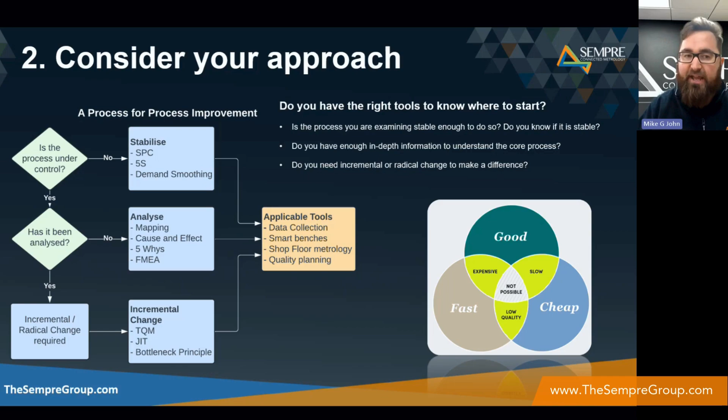So all of these need to generally be understood in terms of how does that affect it, because if it's cheap and it's good, you need as much of the analysis every time. If it's good and fast or whatever it might be, do you actually want to renege on the quality aspects here? And what you really want to be doing throughout all of this is taking all these in together. So this aspect here, in terms of considering your approach, often is the most time consuming, because you're usually finding a different technology, you're looking for solutions which can help you gather your data, etc.

Once you've got through that aspect of understanding what approach you need, understanding that we need data here, we need to analyze this and everything else, then you're going to start to look for solutions. You're going to say, right, okay, how can we stabilize our process? How can we analyze our process? What tools do we need in order to do that? And how does it fit within that aspect of, do we want it to be really cost effective? Do we want it to be absolutely robust? Do we want it to be fully automated and future proof? Those aspects really.

A lot of the time, that's where we find a lot of our customers come to us. They've gone through this journey or a journey, and they're looking for the solution. But we do often see that steps 1 and 2 haven't necessarily been thought about. So they're coming in from we can't measure this feature, this part, and we need to measure it. It's more of we have a problem to solve, rather than we're seeking the outcome, which might be, instead of we need to measure this part, it's our customers or our clients have expectations or standards that we currently can't meet. It's a slight paradigm change, subtle, maybe too subtle in many ways, but important, as we see.

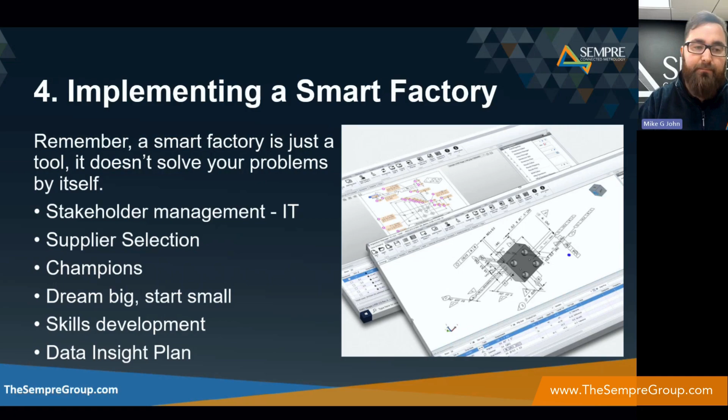And then finally, really, this is the crux of a smart factory: the informed decision making and then refocus. The step here I've got is shamelessly stolen from a sci-fi book that I very much enjoy, which is that if you have data, you can get insight. If you get insight, you can get control. And if you have control, you have power.

And that really is what we're talking about here: through the acquisition of the correct data, you can have the power to make the decisions, knowing that it's going to make a difference. And that is really the end goal of this entire smart factory. We've got everything involved. It's nice and shiny. Everything's blinking red and green lights. But that's not it. You then have the data. Now the problem is, how do you go about talking about it?

I'll harken back to a customer that we had a couple of years ago who did just this, and they had an idea of exactly what they wanted to do. This is the same customer with the grinding machines for an aerospace application. They replaced their old machines with brand new ones. They replaced all of their gauges with automated metrology systems and fixtures, and the data was all being collected and analyzed. This is an aerospace application where 100% inspection is often key, but it also allowed them to understand when the redressing of the grinding wheels needed to occur.

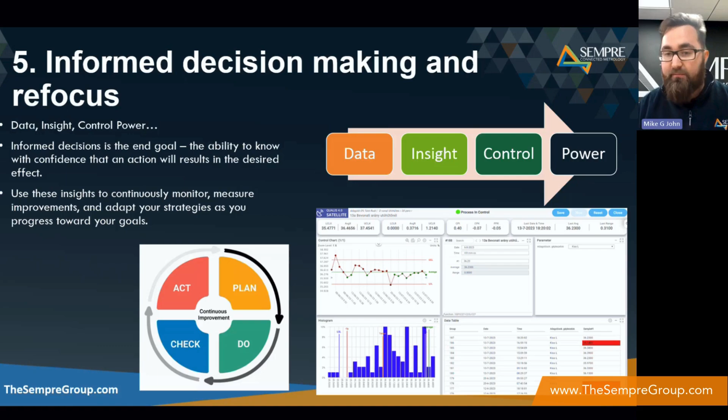It was the attitude, the implementation, and the accepted fact that the plan, do, check, act, continuous improvement type philosophy is going to be brought in throughout the next 12 years or whatever it might be.

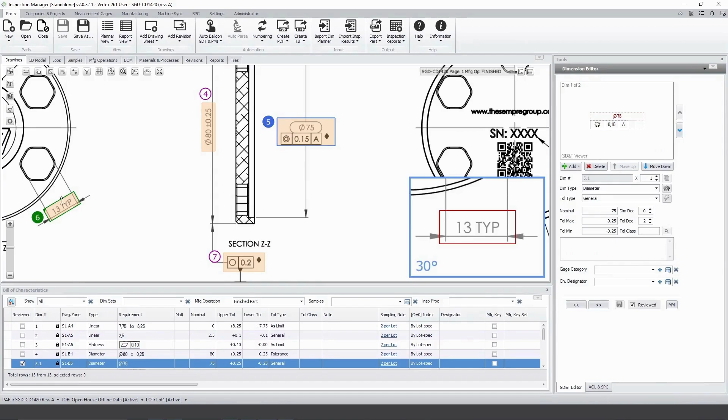And so with that, I just wanted to give a quick demonstration of what we mean by this in terms of what you can see if you came to Sempre, which is a smart manufacturing demo. This is something you will see internally at Sempre. We have something called High QA, which is software that allows us to automatically balloon and create inspection plans for our components. This component is one that we've designed and made ourselves.

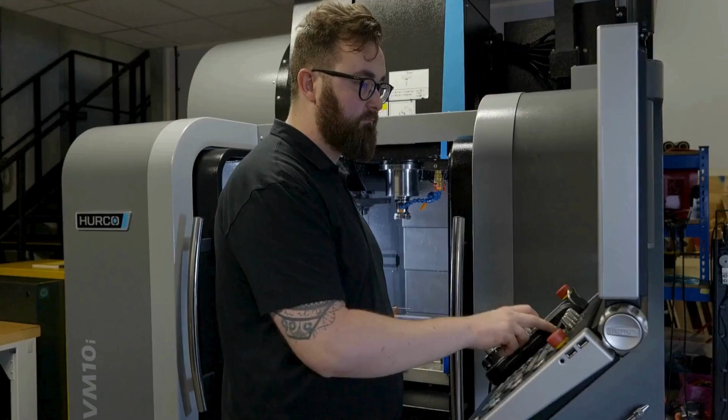And it allows you to, as I said, automatically balloon your drawings. It will produce an inspection plan, and then you can go and manufacture it. And this chap here is currently manufacturing some stuff on our machine tools that we have here at Sempre. And so we're going to manufacture it.

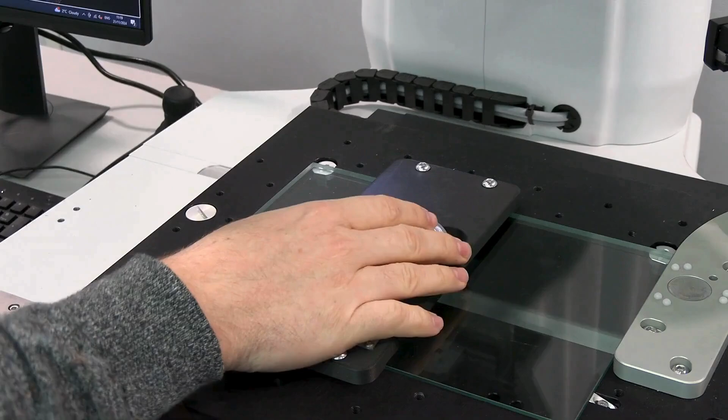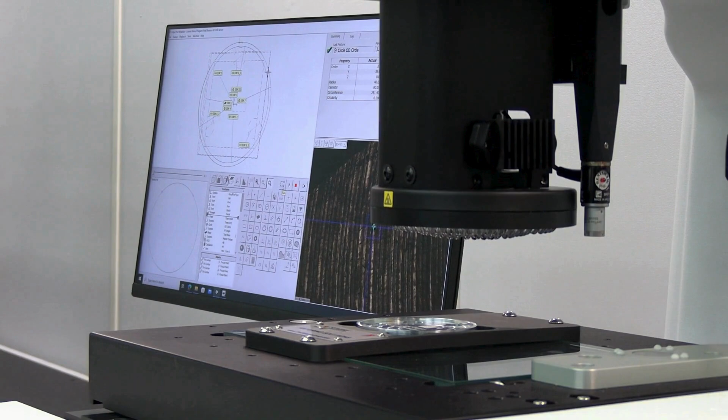We would then laser engrave the system with a serial number and traceability information, as you can kind of see here. We'd then pop it onto one of our MicroVu systems, which is an optical CMM, which you can see is automated. So you pop it onto a fixture, you press go, and as it's running through, inspecting the component, all of that data, which is traceable now because we've got a serial number on it and a QR code,

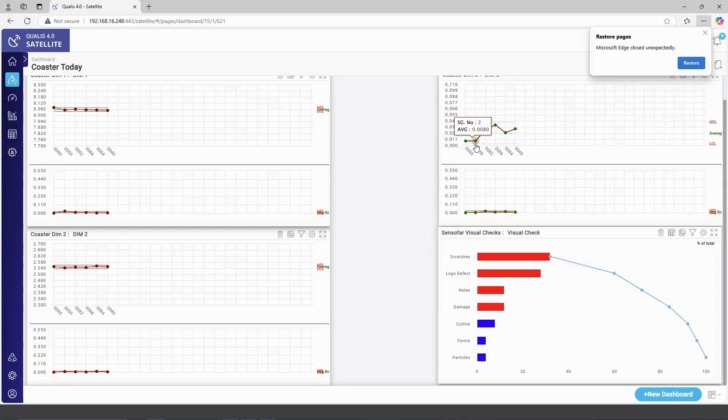all of that data is then brought into the system, and then it's automatically exported into something called DataLyzer, which is a kind of a data collection and analysis software. And you can see as I'm going through here, you'll see in a minute that a new record has come through. So all the data that we're taking for these parts is being recorded automatically through the data collection,

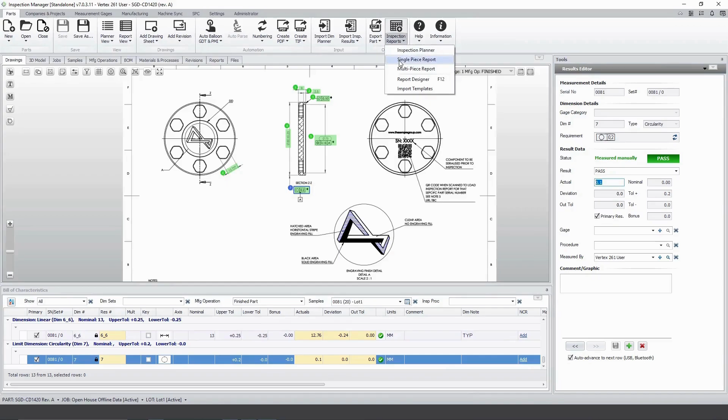but also then from an analysis point of view, you can then go and find all the parts that you've done, bring it back into high QA. You can then analyze what you're seeing. So the little flags that have gone green are green because it's passed. And then you can go and create automated inspection planning reports from this.

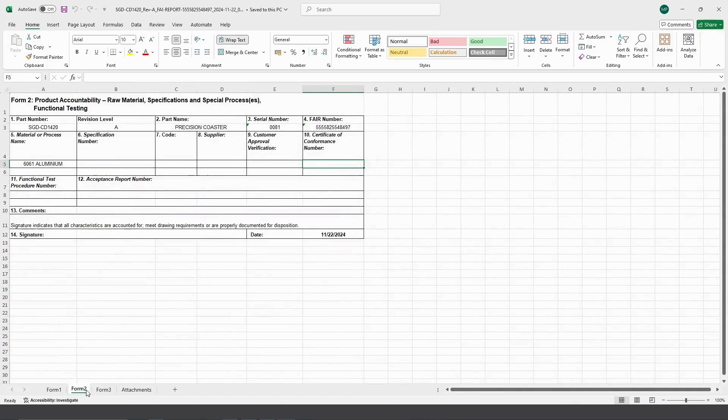So you press create report, and this is an AS9102, so typical aerospace form 1, 2, and 3, and it's automatically been populated with the right information. So very quickly, I mean, this is just a 2-minute video, but very quickly you can see how we've managed to create something. We've manufactured it. We've created inspection plans for it. We understand what needs to be measured, and then we're able to collect that data.

We're able to then draw insight from that data in terms of, okay, we need to change the setup, we need to move it here because the concentricity is out, whatever it might be, and then we're able to analyze it even further in terms of producing regulated compliance documents based on that data. So like an AS9102 or a PPAP or whatever it might be in terms of what you need. And that's the kind of technology that you can use to implement a smart factory.

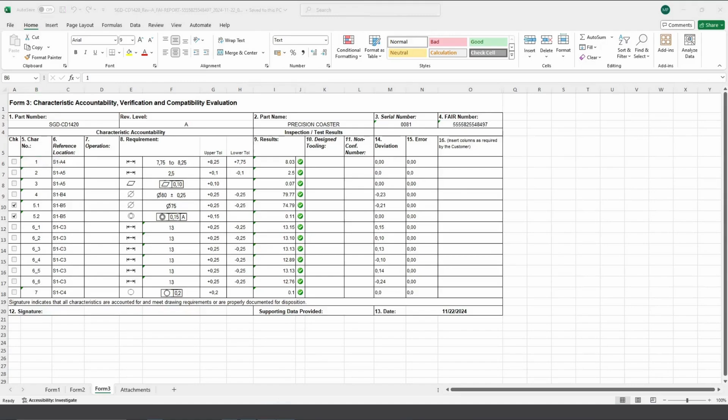And really that brings me to the end of what I'm talking about today, and I'm just talking now about how Sempra can help in that. So we talked a lot today about generic business processes in terms of understanding your approach, understanding your outcome. The solutions aspect was only one slide of this, along with the informed decision making, along with the demonstration. So really it's a lot about the questions, and where we can help a lot of the time is the fact that we do this regularly with lots of clients.

So we tend to understand the questions that you need to ask more than the solutions, or answers, for want of a better word. I'll start again. You'll come to us, we'll probably ask you questions you didn't know to ask, and then once you go away and come back with the answers to those questions, we can generally help you. And that's the important aspect, is getting the right understanding of the right questions.

So we help you discover your outcomes, we help you understand the data, and we can basically help guide you through this process, through the application of technology, through answering the right questions, through the expertise that we can give. And that really is the thing that we're looking at.